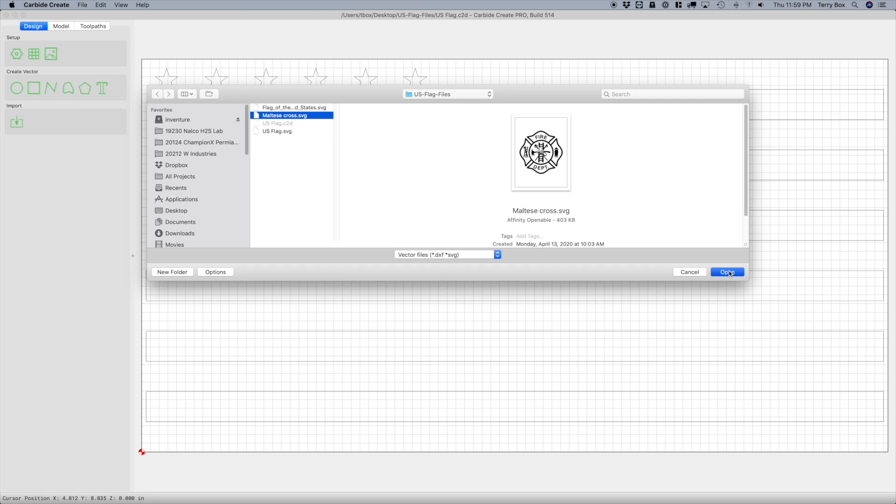Let's import the Maltese Cross so we can use it as the extents of our modified flag. Ideally, you will want to use an SVG file that's either in the public domain or one that you pay for the usage rights. We only need the outside lines, so everything inside can be deleted. Here, I'm removing these outer pieces, then selecting everything in the center by crossing the graphic with a marquee.

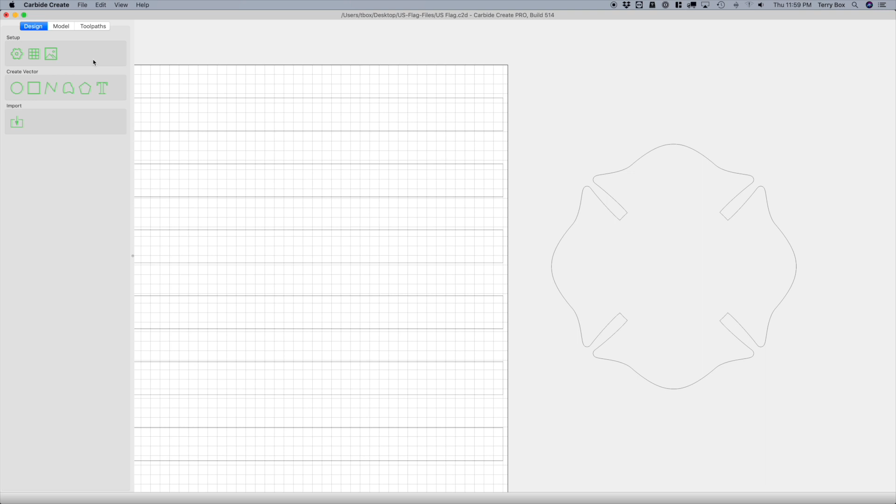Next, I want to place the center of the Maltese Cross at the right edge of the union. You can eyeball this if you want, but here's a neat trick to get it exact. To make this work, I need a rectangle that's the size of the union. I'll draw a rectangle that's larger than I need, and using the align features, move it to align with the top edge of the stripe below the union.

Then repeat that operation to align the rectangle with the left edge of the shorter stripes. Now copy that rectangle and move the copy to the corner, letting it snap into place. Select both of these rectangles and do a Boolean intersection to give you the union.

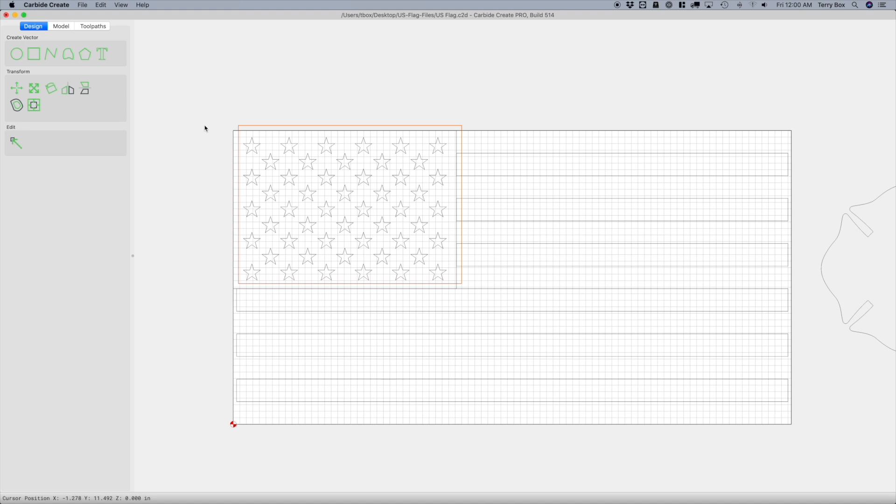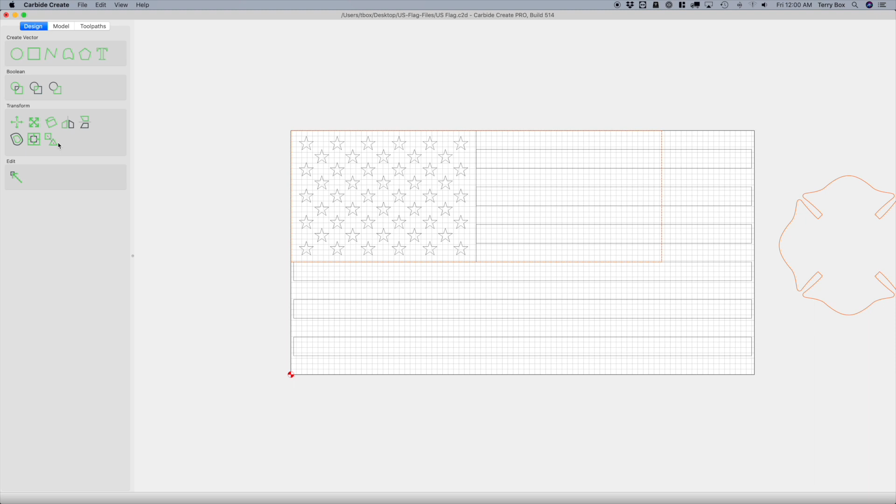In order to center the cross, copy this new rectangle and move it to the right, snapping to the corner of the union. Then edit its nodes to move them to the left edge of the original rectangle. Now you have a shape that's twice the width of the union. Select the Maltese Cross, then this new enlarged rectangle. Use the Align tool to center the first selected object on the second.

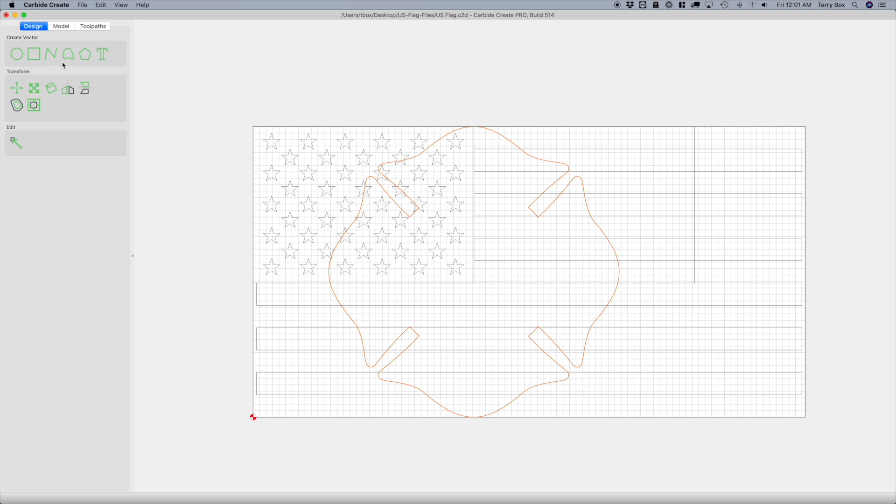Using the Scale tool, we can set the height of the Maltese Cross to be the same as that of the flag, and its width will be automatically adjusted. Now, just use the Align tool to center the cross vertically with the stock. We're finished with these rectangles, so we can now delete them from our file.

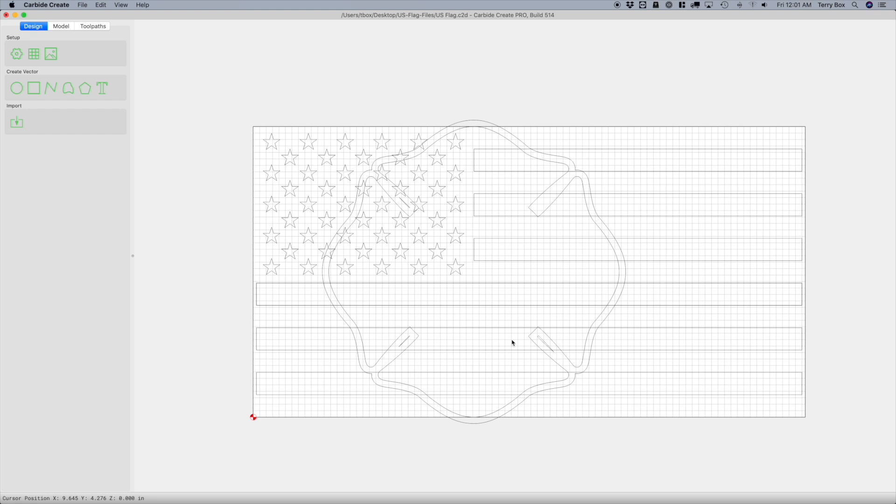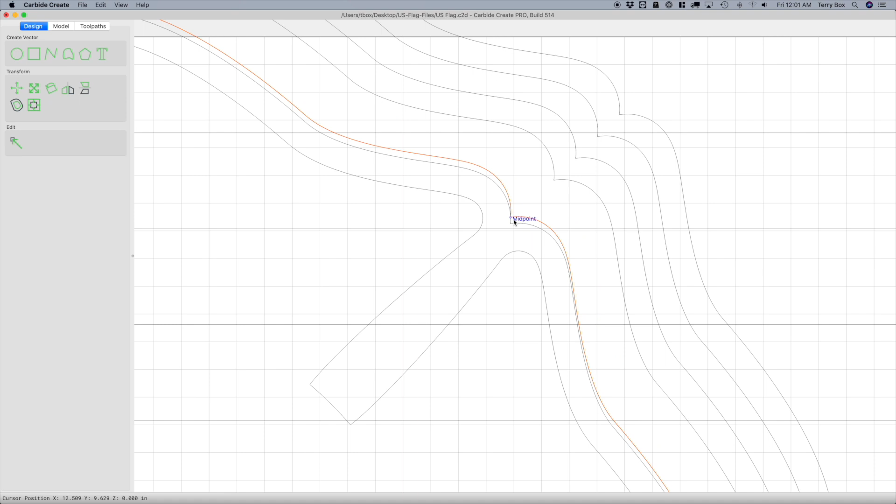Next, select the Maltese Cross and do an offset to the outside to create new boundaries for our stripes. We can also delete the little leftovers inside the little alleys, if you will, as we won't need them either. Duplicate that offset shape. You will need 6 total, 1 for each white stripe. Move these copies to lie directly on top of the original, snapping to the nodes to get an exact fit.

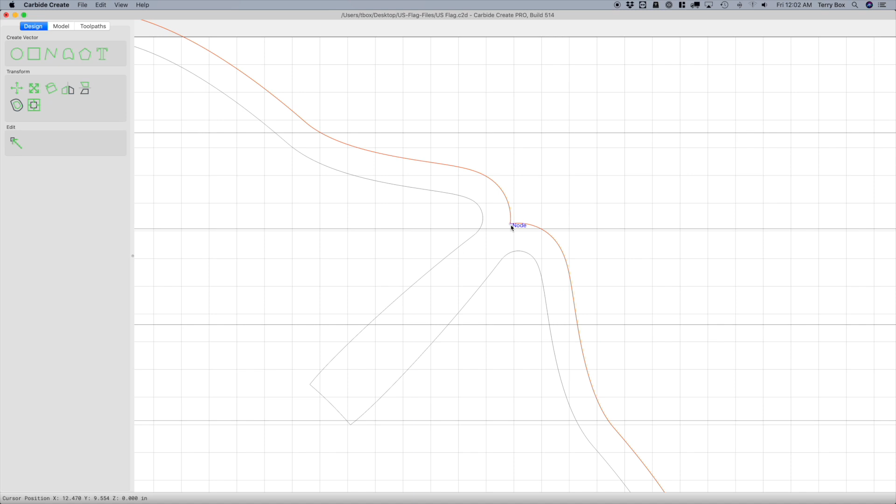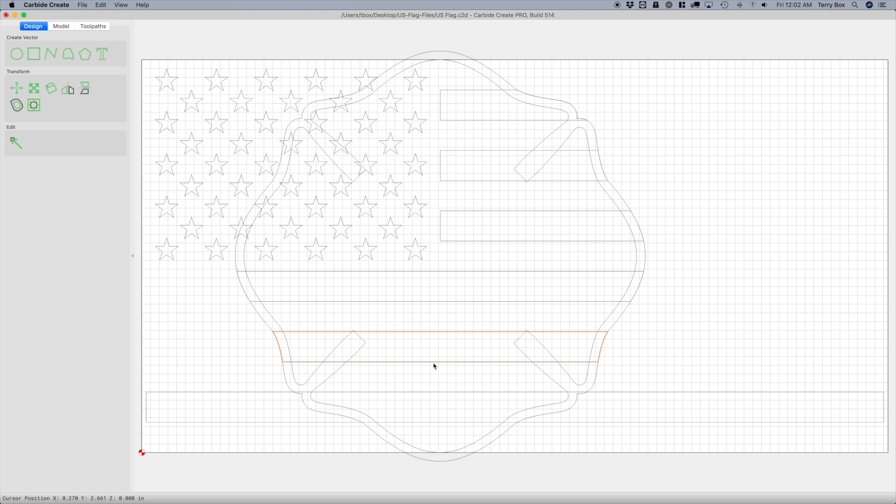Once they are all in place, select a boundary and one of the stripes. Then use the Boolean intersection function to create a stripe that extends off the edge of the cross. Repeat this for the other 5 stripes. Now we can remove the stars that are no longer needed. Ungroup the stars and delete those that lie completely outside the cross.

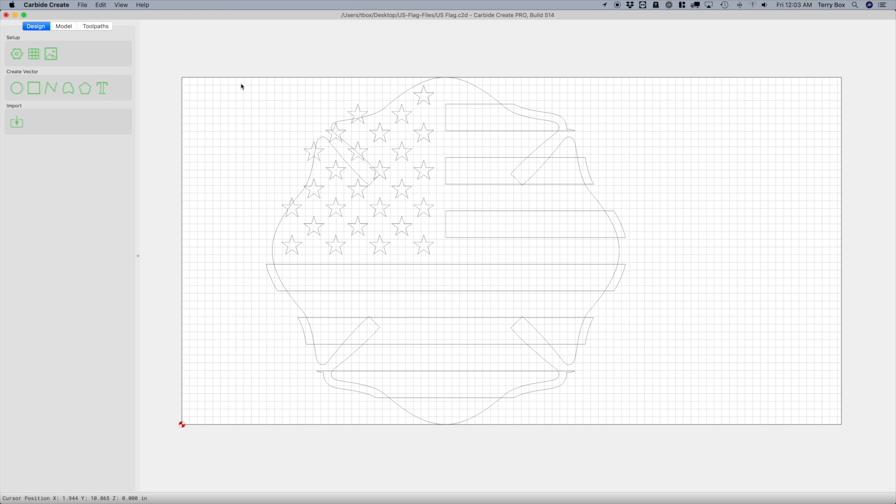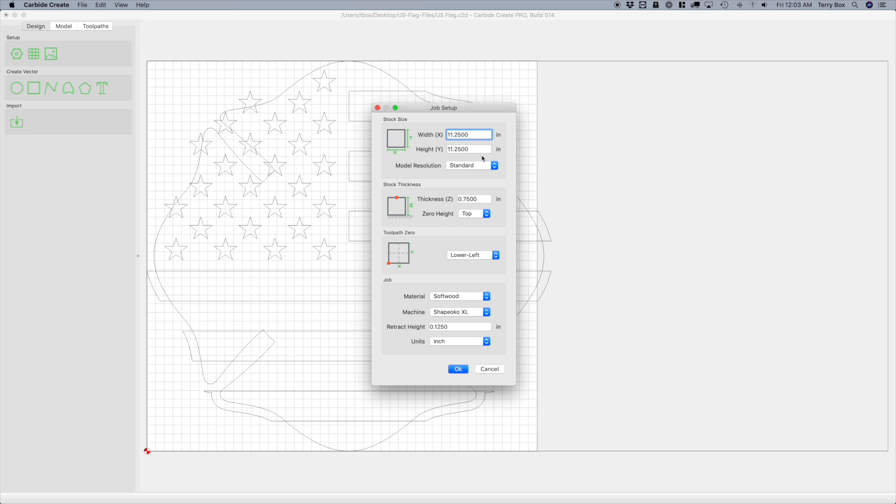To complete the design, let's group everything and move it to align with the left side of the stock. Finally, we can edit our stock size to be equal in width and height. Oops, the stock needs to be a ½ inch wider to account for the ¼ inch offset on both the left and right sides. There you go, our finished artwork ready for toolpaths.

Select everything and ungroup it. Switch to the Toolpath tab and you'll see 2 that were set up in my starter file. I like to number my toolpaths and end their name with the end mill used. Double-click the first toolpath so you can make changes. Now highlight all the stripes. Then you can review the settings and click the Edit button in order to modify the depth per pass.

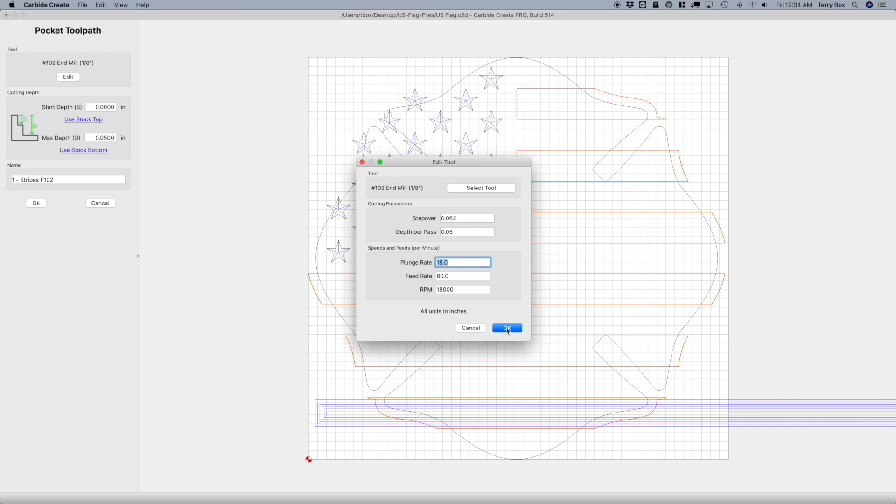When you click OK, the toolpaths will be updated to the shapes you've selected. Now double-click the second toolpath, review the settings, and then click OK to close it.

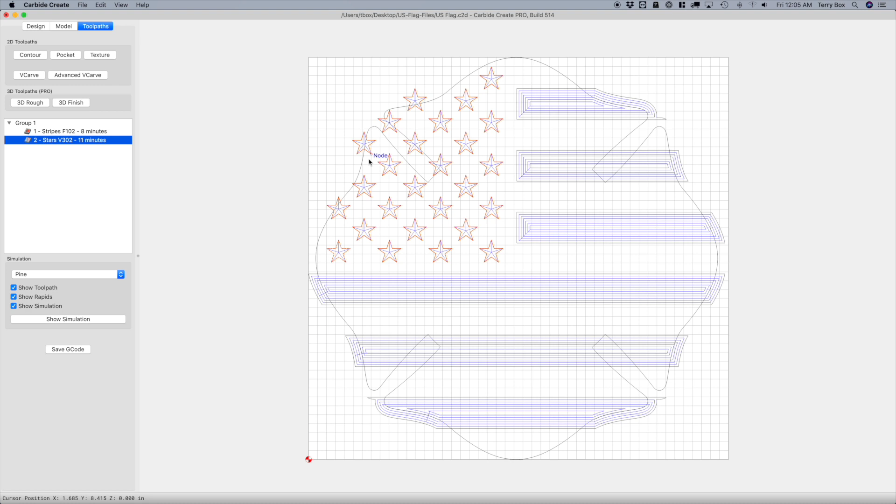Our final step is to create a new toolpath to cut out the Maltese Cross. Select the shape and choose Contour. Next, we'll select an appropriate end mill. Then edit the depth per pass, setting it to 1/4 inch, matching the end mill's width.

Now that the tool is set, click Use Stock Bottom to set the depth equal to the stock settings in your project file. Make sure the toolpath settings is set to outside right. Finally, name the new toolpath. I chose to not use tabs since I typically stick my material down using the tape and super glue method.

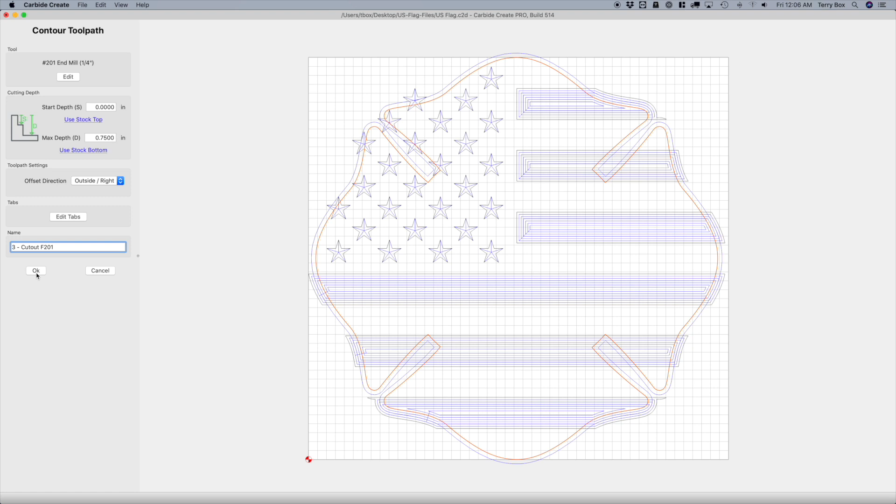Don't forget to save your project. And next, save out the G-code for Carbide Motion. Here, I'm measuring out the size of the union, marking it on our blank material. I got these dimensions from Carbide Create.

Next, I'll use a craft knife to cut a thin groove into the material. This will keep the dye from bleeding across the edge. I'll sand the surface to get a smooth finish before applying the water-based dye. I'll also moisten the surface to raise the grain before sanding a second time. Here I'm just scoring the lines again to make sure I didn't lose anything in the sanding process.

As I apply the painter's tape, I'm using my fingernail to press the tape down into the groove made by the craft knife. The goal here is to have a crisp line for the edge of the blue. For this project, I chose to use RIT dye so I could still see the wood grain, yet had vibrant colors.

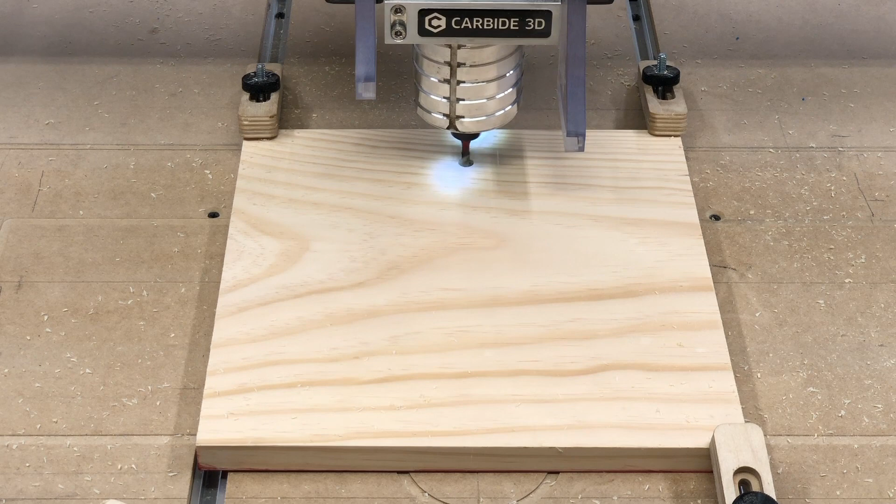I like to use my CNC to cut keyhole slots. It does a perfect job. You can see here that my dye job wasn't perfect, but in the end it won't matter. You can also see that my stripes did not end exactly at the edge of the union. I'll have to come back later and fix that.

Obviously this is sped up. I would love to be able to cut stars at this speed. I made this project a couple months ago and have since learned to optimize my projects better. Now I run most tool paths with what equates to a roughing pass and a finish pass.

Now my team of angry bees will work like a busy beaver to cut out the Maltese Cross. Here you can see I came back and cleaned up the edge of the stripes.